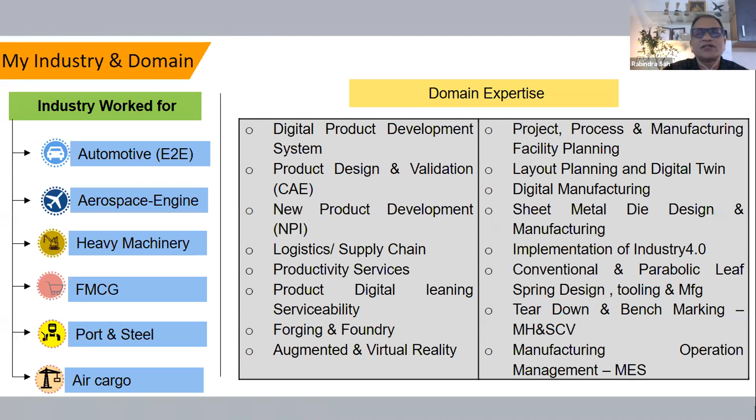Physically, I've set up 5 manufacturing plants for automotive - 4 in India, 1 outside - but entirely done digitally first and then physically. This includes sheet metal, layout planning, process planning, forging, augmented virtual reality, Industry 4.0. I've worked for many organizations setting up their industry roadmap and technology. So this is the industry I have worked in.

It will motivate all the participants that I've worked for so many organizations across American, European, and Indian customers. My prime customers have always been Tata Motors, Tata Hitachi, Tata Marco Polo, as well as Tata Steel. I have worked a lot on digital transformation, and I will talk about OEMs and tier 1 suppliers globally. I've been fortunate to work in this space.

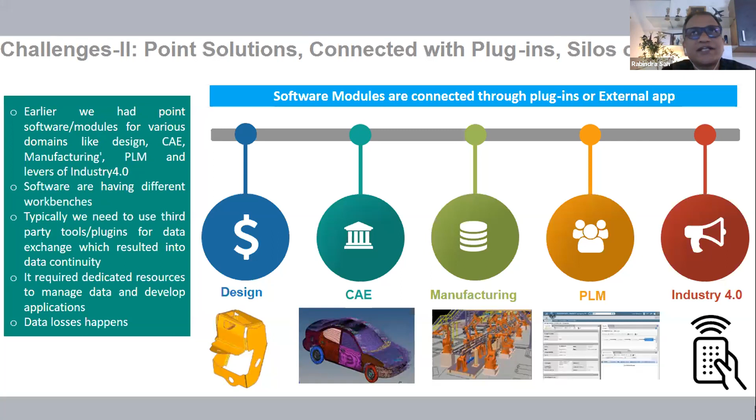So these are the two basic additional challenges available, which we have seen in the past. Now, how am I going to see in the next set of slides, how these challenges can be addressed and overcome using the technology of product lifecycle management. And here a lot of data loss happens in this platform. So now moving to the next slide.

Before that, I talk about—I have especially prepared this slide for all the students to know that when we develop a product, there are multiple stages that happen. One, you can see here, you collect the requirement from the customer.

We call it the strategic and concept model. Meaning you talk to the customer, collect feedback, do surveys—say you are going to launch a car, you do the survey, collect the information, data, specification, expectation. So that needs to be managed. This is one stage of the product development process.

Second, the designer gets into it and starts designing, but does many parallel works. He doesn't only do design—he also does benchmarking, takes competitor data, studies what product they are using, what specification, what material, what manufacturing process. And in parallel, you need prototyping, design, modeling, and also durability analysis or crash analysis.

So in the product life cycle, all things happen concurrently or simultaneously. We also need to release data for manufacturing and tooling—die design also needs to happen in parallel, along with tooling manufacturing.

Excuse me. Excuse me.

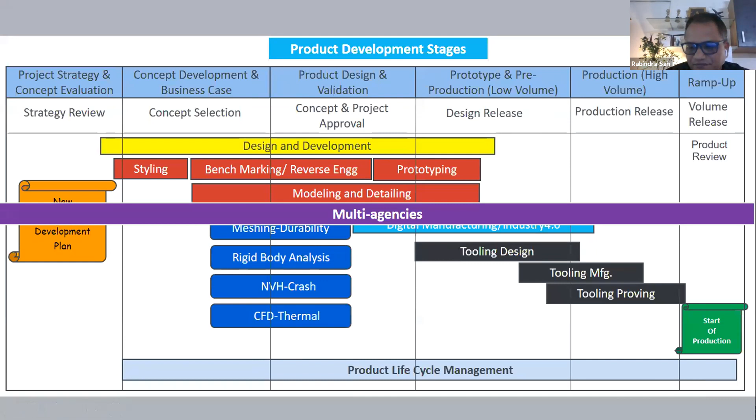This concept, in this way or the other way, is applicable across industries—whether you are working in automotive, aerospace, transportation, mobility, agriculture, high-tech, natural resources, or mining. There are some stages of product and process resources either way. So this is not limited to one particular sector—this is what I wanted to share through this slide.

Having talked about the challenges and background, I'm moving on to the PLM enabler—what is the digital thread and transformation—in the 4th slide, then I will talk more about PLM.

Now coming to what is product life cycle, let me give a definition. It is a process of managing the entire life cycle of a product. Meaning, when you design and conceptualize a product, then design it, manufacture it, do CAE validation, manufacturing, quality, and then sell it to the customer—sales information, warranty—and then the product dies. So for the entire end-to-end, from beginning to end, all information and data is managed through particular practices, for which we use product lifecycle management.

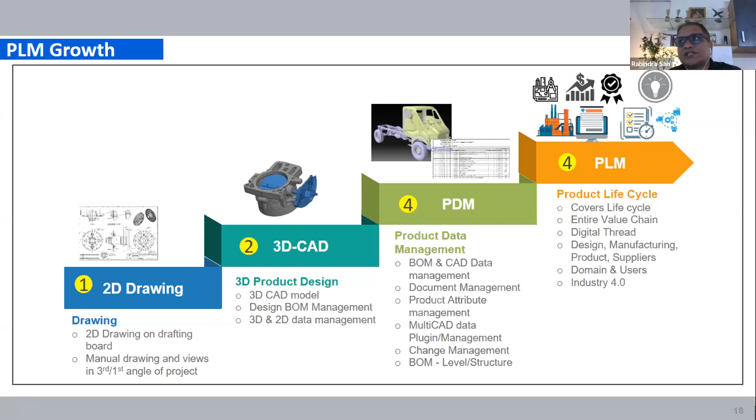So PLM is now the backbone. We manage, collaborate, and link with all areas. A lot of technology is available, which we will see in the next couple of slides. So this is how the growth of PLM happened - 2D drawing, then 3D drawing, then PDM, and then PLM. And PLM, completely, the digital thread is the backbone - Industry 4.0 goes into PLM.

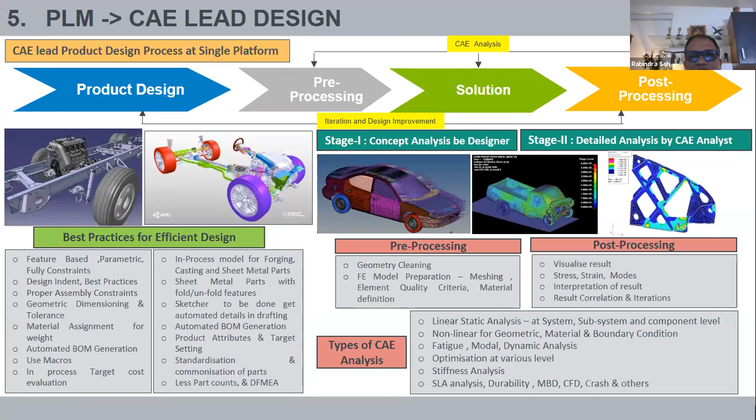Now this is a very important slide. We say that PLM becomes the corporate repository - whatever data or information you want to collect, just check it into the PLM. Check-in means the idea documentation, product specification, prototype, testing, design FMEA, design for manufacturing, or design for Six Sigma. Because when we design, there is some methodology adopted - these provide the sequence, the checklists, the quality documentation to be followed, the way we need to do the design. So PLM provides a common repository of all documentation.

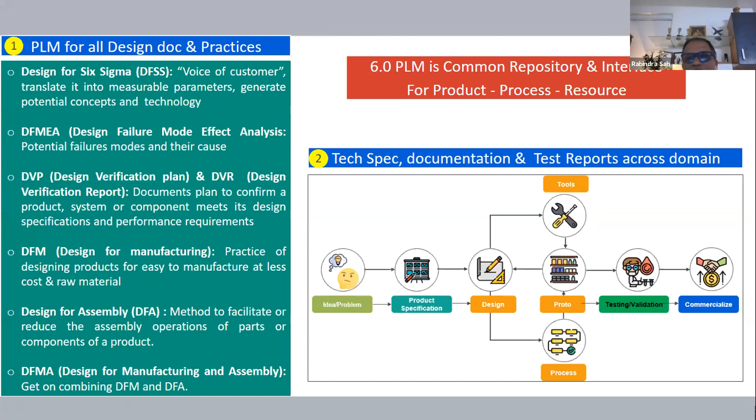I talked about the design - all documentation with change management, with versioning. One version changes from V1 to V2, no need to worry about it - if you want to go back to the old version, you can do it. So PLM provides that all design documents and practices are managed through this. Now this was about your design and prototype also - when doing a prototype, if you want to learn something or gain knowledge, all of it we have built and you can check it in there.

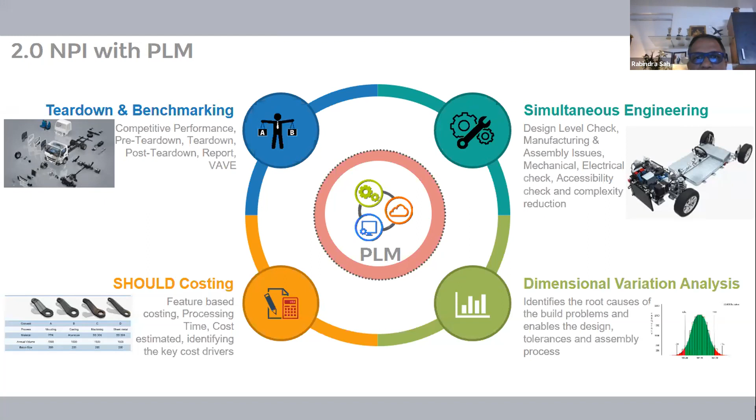Now moving to the project. This particular slide I created because I wanted to talk about digital twin technology, which is very prominent nowadays. What is digital twin? Let me take an example.

Say you take a car assembly plant. The objective is to make the car assembly plant, and my goal is to reduce the time and cost of the process and optimize it.

What we need to do is build a digital factory. So I can take the car assembly line as the entire assembly line. In car manufacturing there will be a paint shop, BIW shop, manufacturing or production shop, tooling shop, trim shop - a lot of shops. So I'm talking about one assembly.

I can give the boundary of the digital twin to the entire thing, one line, or one station. So any line or the whole plant can be called a digital twin - I need to define it. So I'm defining that only one assembly line I'm calling the digital twin, and whatever I do the digital twin for, it's for that assembly line.

So the first step in the digital twin is that we build the entire thing digitally. Whatever we see in the assembly line - conveyor, portal, civil or building, nut runner or tightening, storage area, the product - whatever we see physically, we design the entire thing digitally. So the first step is to do the digital design, then create the process.

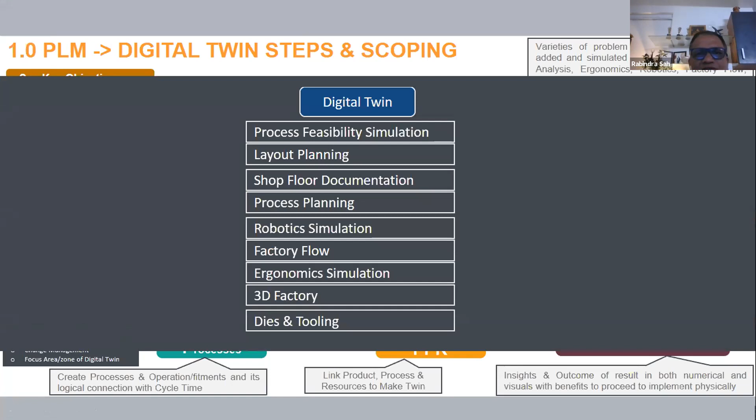So going ahead, this is again how the workflow happens. PLM is there, process simulation, factory flow, process simulation, process planning, documentation - it helps the documentation. The process is needed, operator process, how he's going to do it, what is the control plan, what is the control, and this will be digitally animated in video also.

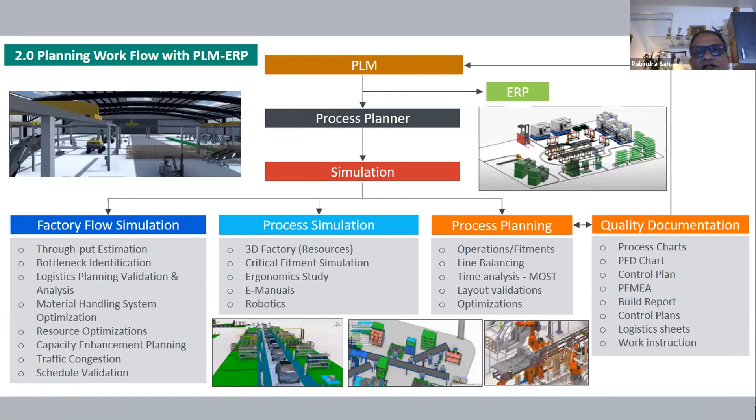PLM lets you create the virtual reality also, the way you want. This is a deeper dive into your process planning, project related. This is a very important slide.

See, I'm just giving you an idea of how the digital factory looks - this is the way our digital twin will look. You can see here, the built-up shed, building - civil people will work here, structure, utility like power supply, or pneumatic oil, material handling, forklift, conveyor, line side, pallet, trolley, machines, layout, robotics, human, or store. All ten things go into the digital plant or digital factory, which enables the digital twin.

And you can see here, PLM - PLM is the backbone, a pipeline, a single source of truth for all the people. People working in manufacturing will work only with the backbone of PLM, product life cycle. So it's very important - the PLM life cycle is a software.

So all data goes there - it happens properly, it is not duplicate digital data. No one can keep it on a hard disk or locally; everything will be managed live with a single source, and everyone will refer to the same data. Say the utility department is working, civil is working on something, say I can work on layout planning - so they can work simultaneously, concurrently, which enables it.

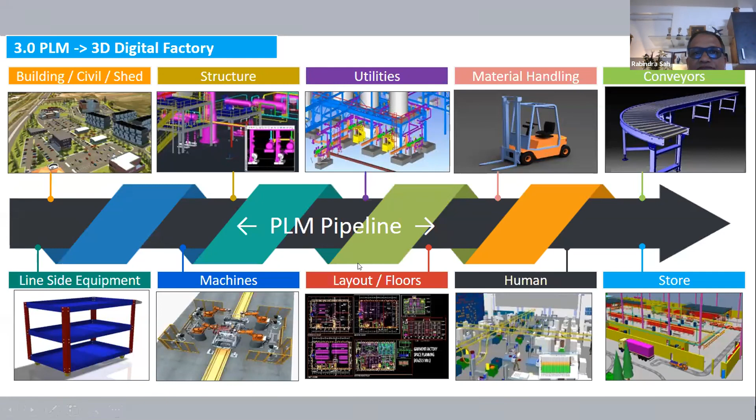This is the same thing - nowadays we say, what is happening in industry? We are pushing more and more digital, which is digital transformation. The more we do digitally, the less physically we need to do - less time, cost, and rework will be saved.

So here I put two examples. The top row shows point A, here the Greenfield project - Greenfield project is about just making a business decision, make-buy is digital twin and digital approach. Below is the Brownfield project. Brownfield project is what? I have got a plant where I want to introduce a new product, or I want to improve the process, or I want to use new technology.

So this is the difference between the green project and brown project. All this happened on the left hand side, the yellow part, the flag - all we do digitally. Nowadays OEMs are focusing more on front loading, pushing everything digitally first. Digitally we can see how many trucks or cars we can produce, collision, space required, efficiency, utility - all we can do. Once this is made the target, then we open for doing the physical work. So OEMs or tier ones are looking into doing it more and more digitally - once digitally proven and established, then we go for physically. Until unless you do not do it digitally, the gate will not open, meaning all data will be protected. Once the gate is open, then people will start working physically.

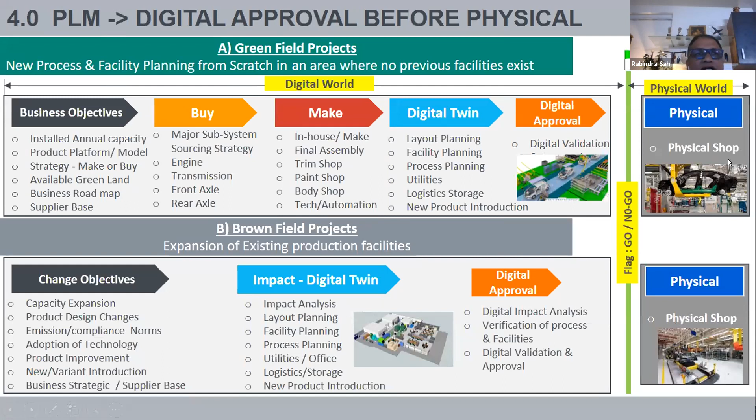Line balancing - so what happens if you use the technology for making one product for processes, for a second model it becomes very, very easy. Say only 20% needs to be reworked. So the time and cost saving happens.

I'm moving ahead a little. So here, digital is the way for time and cost saving, collaboration, and faster time to market. This is the message this particular slide gives.

I'm moving to the next slide - sourcing and enterprise resource planning. Just a quick check - Ronit, are you able to hear me and see my screen? Abhinav, can you see my screen, can you hear? Yes sir - perfect, good.

So now I'm just touching on this - I have covered design, I have covered NPI, I have talked about project. Now I'm going to four and eight. I'll quickly touch on this, then you can get into questions. PLM and ERP - ERP means SAP, we have heard of ERP. ERP will require the bill of material, which part is used in a car, what are the processes, what are the timings, because they will do the costing. They require the CAD data, they require the drawing to raise the purchase order, do the ordering stages, the inventory - all inventory related work we do in the ERP. So they all pull the information from the PLM. If ERP is a separate software, they can connect with the PLM software and collaborate and work for all this kind of activity which you have written here - drawings, giving to the supplier - all we can do it here.

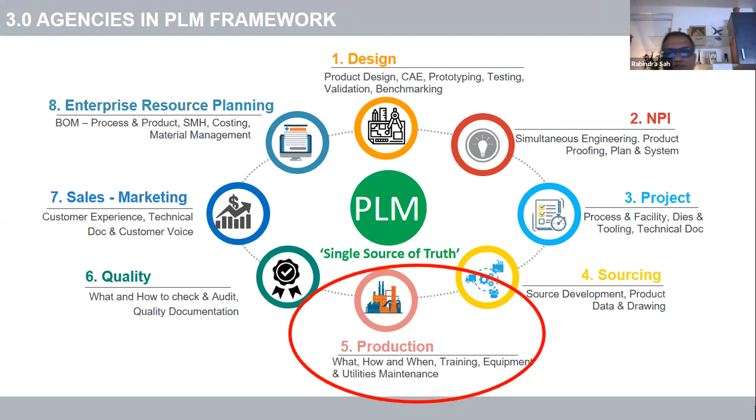Now I move to the next - production. It's a very interesting production team. What does production need? Say you have an assembly line, take the example of a car - he will do the assembly. He will require the instruction of what parts he has to assemble. One car is made, there are 500 types of models and cars made. So whatever model we are making, whatever variant we are making, what processes are there, what part I have to put, how much time is required, how many laborers I have to put - all this information will come from production. They also require training, how to train it, to do the training or maintenance. So all will come here. So what we do in digital manufacturing - the process team has created the processes.

He can create digital content for video as well, or he can create virtual reality content with the same data. A technology enables this process. You can create job instructions here, or put it on a kiosk board or TV, where the worker can come and see how the processes are being done. Because in PLM, we are creating work instructions or step-wise documents or training material - like how to put the leaf spring, what process steps to follow, what part to use, what safety precautions to take, what quality parameters to check, how to take material from the pallet. All such information comes from PLM and the production team can access it.

Augmented and virtual reality I will talk about separately. So this PLM enables the production demand. We can see how single source of truth, the PLM platform, enables the whole ecosystem.

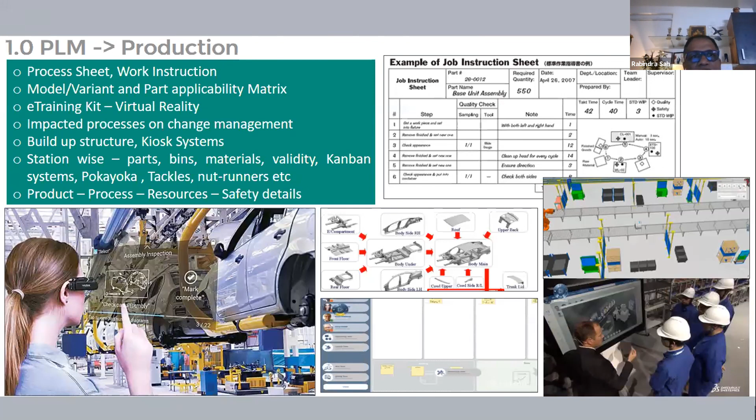Now I put these slides especially because this is the talk of the day in PLM as well as Industry 4.0 - virtual reality and extended reality, or XR. CAD data, process data, or digital twin, which we created in previous slides, can be used for design review, manufacturing, and you can create training content - sales people can create it too. Nowadays, virtual reality content allows walkthrough of a plant using gadgets like HTC Vive or other Oculus mounted devices - you can walk through, pick parts, assemble, disassemble, and virtually train on all such things using virtual reality. Nowadays very easy, quick tools are available to do this.

So whatever you see in PLM, virtual reality again comes through the OEM software and platform. They pull the data and create the virtual reality for any agency - like salespeople or dealers who want to sell can demonstrate the product, or a customer coming to the dealer can experience the product through virtual reality. This helps with time saving, cost saving, easy training, easy troubleshooting, and easy maintenance-related activity creation or repair - all such things we can do for production.

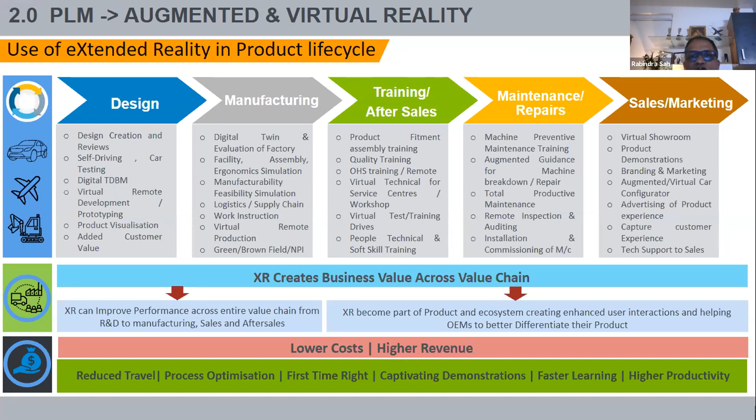And it applies across - this particular slide is for all of you to understand how product life cycle management is enabling on the platform base, through collaboration.

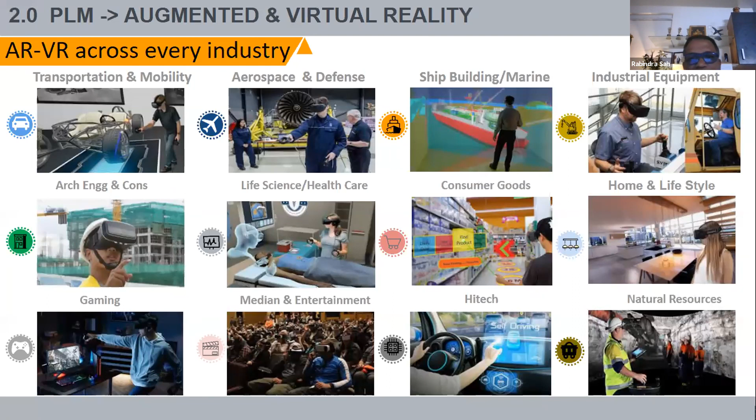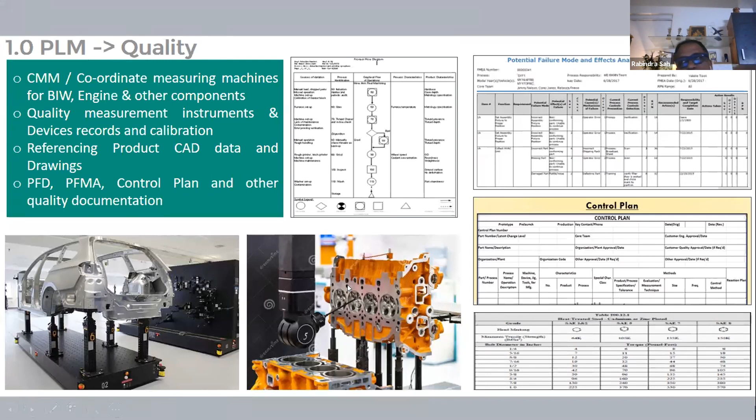So again, product lifecycle, same platform, collaboration, faster time to market, and all stakeholders or digital thread people can access the same thing and same data. And this technology is now available and provided.

So this is the quick point one. We have challenges in the digital transformation ecosystem, which I've spoken about in depth. Only four slides left, and in the next five to ten minutes I'll cover the benefits, summary, and questions.

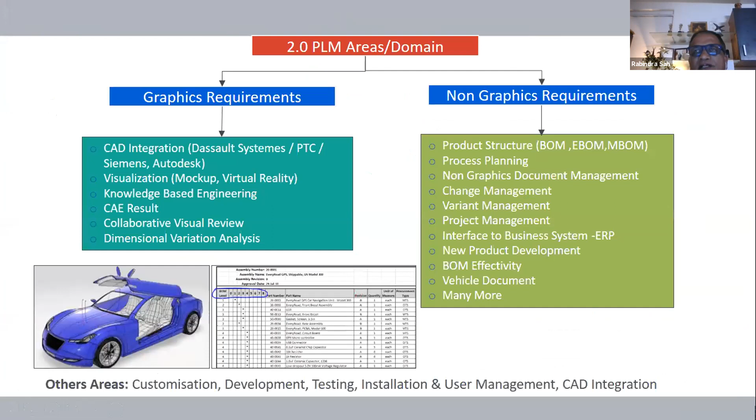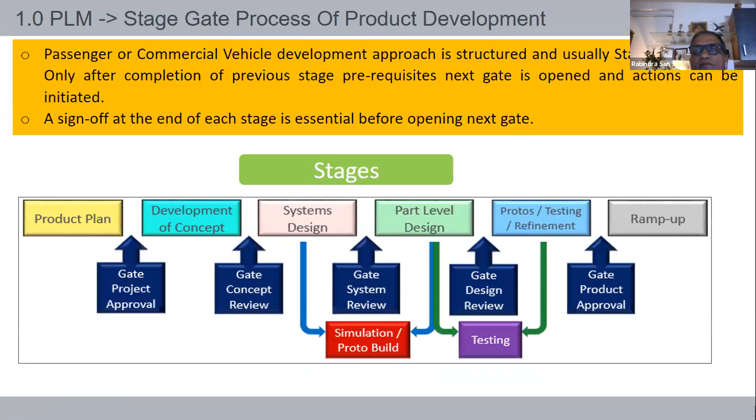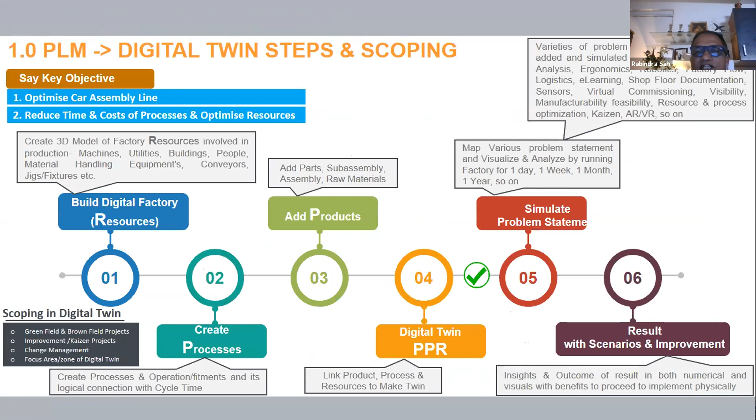No need for reinventing, but if you want to develop a better solution, you're always free to. PLM, as I've shown, has to manage the CAD data, multi-CAD data, document and change management, graphical and non-graphic data, and all functionality needed for that particular industry. In a nutshell, whatever I've talked about today should be available in the PLM to make the software good.

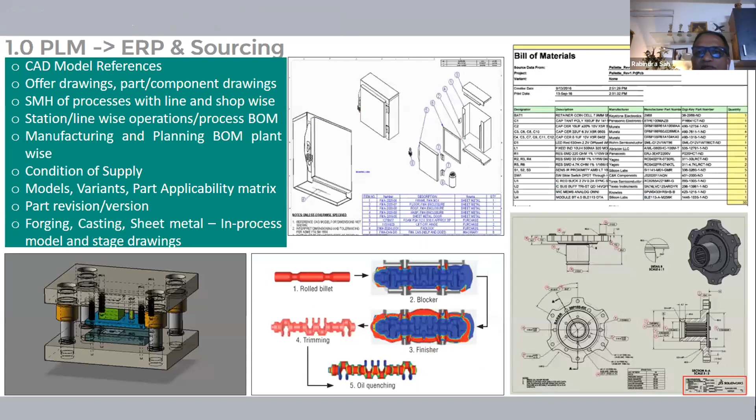Sir, is coding or programming language necessary for working in the production department in industries?

Production, yes sir. I'll define the role of a production guy. In a typical industry, production leaders are always the leaders of the primary function in the organization. That's what I have seen, and that's the way it happens. The role of a production engineer is that he has to learn how the processes happen, how process planning is done, what tooling or simulation is, and how productivity calculation is done. But his primary role is to supervise and guide the laborers or manpower to do the assembly, and ensure that whatever target is set, the engineer leading that line, handling the line with all the operators working in it, achieves it.

He needs to ensure that whatever target is there, he achieves it, whatever improvement or innovation is to be done in the process and production, how layout planning is to be done, how the supply chain is managed, how materials are fed into the line, what lean manufacturing is, what Kaizen is. So all this becomes the responsibility of a production person when he is in the shop. He has to manage whatever internally happens in production, and he would be responsible depending on what level he is placed at.